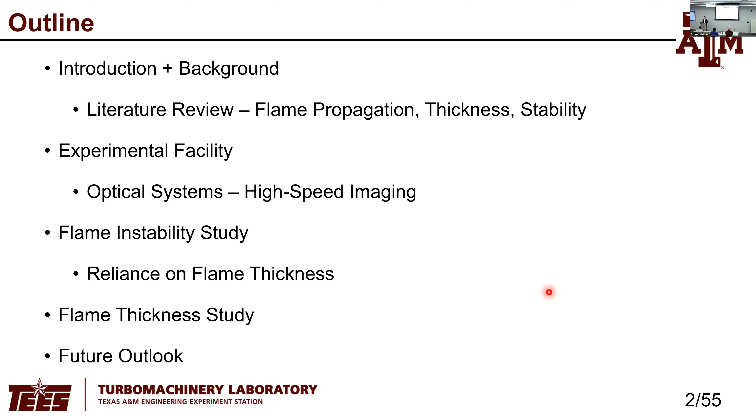So to start off with some background, why does any of this matter? When designing a combustion system, we need to know how fast combustion will happen and how long, both in time and in space, it takes for combustion to occur. In any kind of engine or combustion system, there are a lot of processes that have to happen: fuel injection, things have to mix, we need to get to stoichiometry, more or less. And then the flame has to propagate and burn all of our reactants to release heat and get us the useful work that we need.

The amount of time that takes should roughly match how much time or space is given in the system. So we need to know how fast things occur so we can design systems to work well.

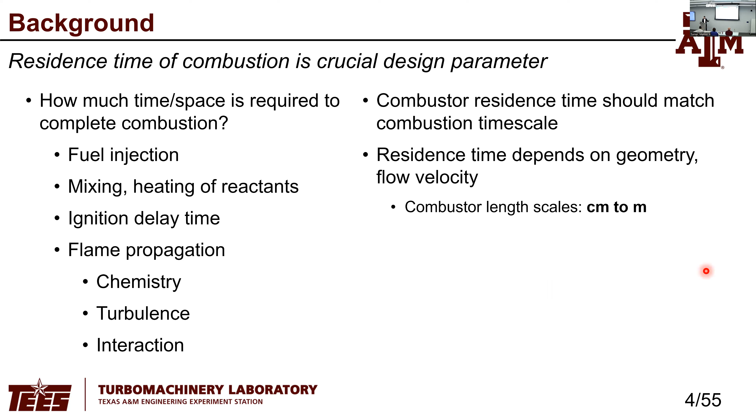Some of the length scales here, we're talking about centimeters to meters, inches to feet. And some of the time scales here are basically on the order of milliseconds overall. Some of the combustion processes take place over microseconds, but overall we have milliseconds for these things to happen. So really, really fast processes, which means we need high-speed cameras, basically.

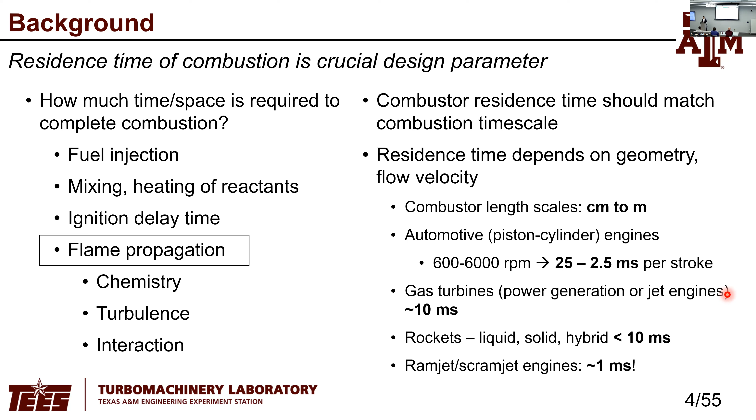With that in mind, we need to be looking at flame propagation. That's kind of where all this is coming from. We're going to be looking at flame propagation, the rates that requires, and the things that affect how fast flames propagate.

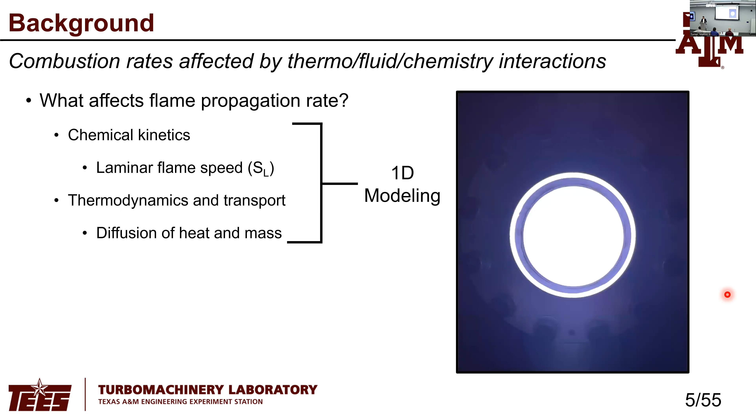So I kind of broke it up into some really general concepts here. The things that affect flame propagation rate are basically chemistry, thermodynamics, transport, and fluid mechanics, which we'll talk about in a minute. Chemistry, thermo, and transport can be modeled in a one-dimensional way, which is relatively simple. We like one-dimensional models. They're easy, fast, relatively speaking.

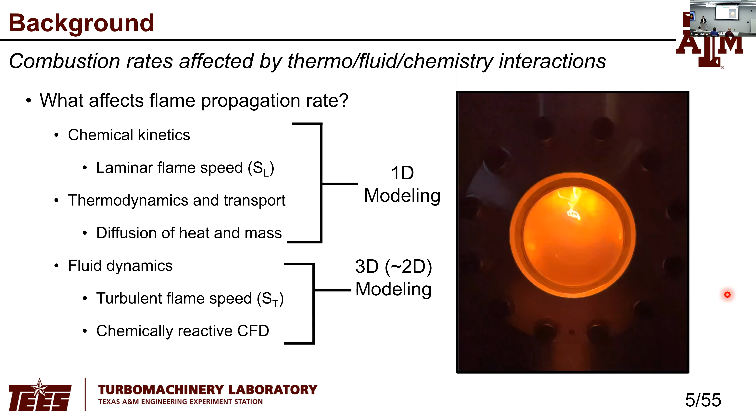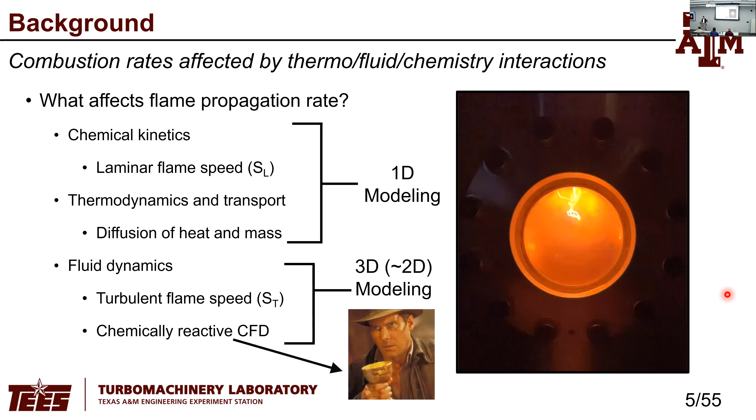It gets more complicated when you talk about fluid dynamics, turbulence, things that you have to account for in multiple dimensions. You can't model turbulence in one dimension. Two dimensions, we can get somewhere. Three dimensions is real, but that takes an immense amount of computational effort. And when you combine 3-dimensional turbulence with chemistry and the rest of these things, we get chemically reactive CFD, which is kind of the holy grail of combustion research.

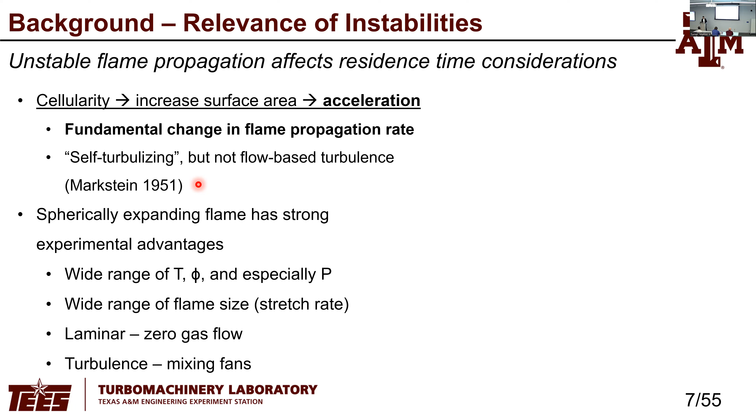We use a spherically expanding flame setup. It has a lot of advantages, mostly due to the fact that inside the rig it's a constant volume, closed chamber, and we can control the fluid flow very well. For a laminar experiment, the gas isn't moving, so we don't have any of the problems that come with a Bunsen burner or other types of flame burners that have to deal with the flow of gas through the burner. There's no flow here, and all the experiments here I'll show are laminar.

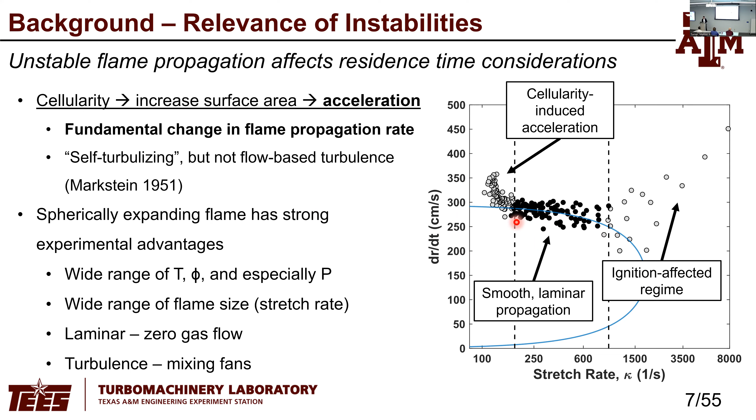Just a little bit of literature review on some of the fundamental research that kind of started this instability field. Darrieus and Landau in the late 30s, early 40s, independently but simultaneously came up with an instability, basically a proof to show that flat planar flames, which are kind of a one-dimensional idealized flame, are inherently unstable when a perturbation is applied to the flame that is greater than the flame thickness.

Their model was relatively simple. It didn't account for flame structure, so the flame had no thickness. It was simply a kind of demarcation between the unburned reactants and the burned products, which meant that it was invalid for small wavelength disturbances on the scale of flame thickness because it couldn't resolve that.

Markstein built on that and did a lot of experiments that showed that the instabilities are controlled by pressure and fuel molecular weight, which are essentially proxies - pressure being flame thickness, and fuel molecular weight being thermal and mass diffusion, so the Lewis number. I'll explain those in a little bit. He came up with a curvature correlation, essentially, that shows that when we have a curved flame, that actually helps stabilize the flame.

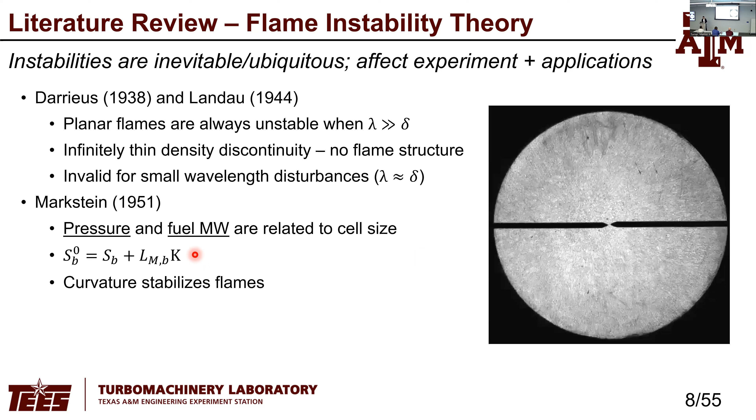So we have a curved flame here, that's our spherically expanding flame. A curved flame front is actually more stable than a flat flame front to these instabilities. About 20 years later, some Soviet researchers actually came up with a spherically expanding flame model. All the stuff before the late 60s was built on a one-dimensional flat flame. There were things built on that, but essentially this was the first spherically expanding flame model in the late 60s that took into account Markstein's curvature effect.

Fast forward another 20 years, and some researchers at Northwestern University in Illinois, specifically Moshe Matalon, built a model that predicts the onset of these instabilities. It takes into account thermal diffusion, mass diffusion, the hydrodynamic instability, and essentially combines all of these effects on a spherically expanding flame and shows how these instabilities will grow with time.

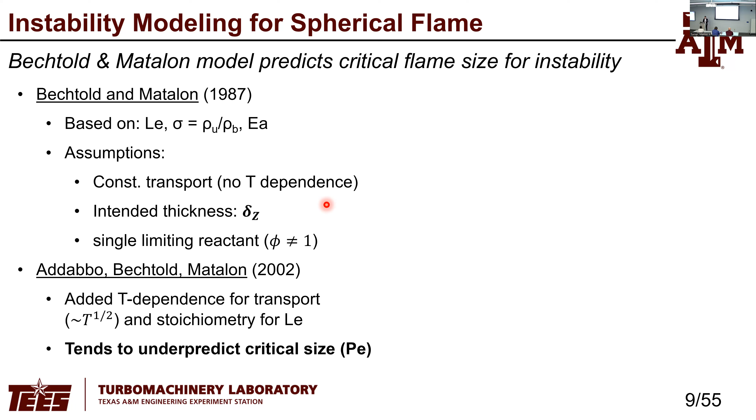There were some assumptions, some drawbacks made with the initial model in the late 80s that basically didn't take into account certain aspects, but then about 15 years later they developed some modifications that took into account temperature dependence of things inside the flame, different properties of the gas, transport properties, and then a stoichiometry effect for the Lewis number, because the thermal diffusion and mass diffusion rates are controlled by which reactant is deficient. So if you have a lean mixture, we're fuel deficient, and that means that's the controlling species.

So one key aspect of this model is that historically it tends to underpredict the critical flame size for instability. What the model does is essentially predict how big the flame has to be for the instability to set in.

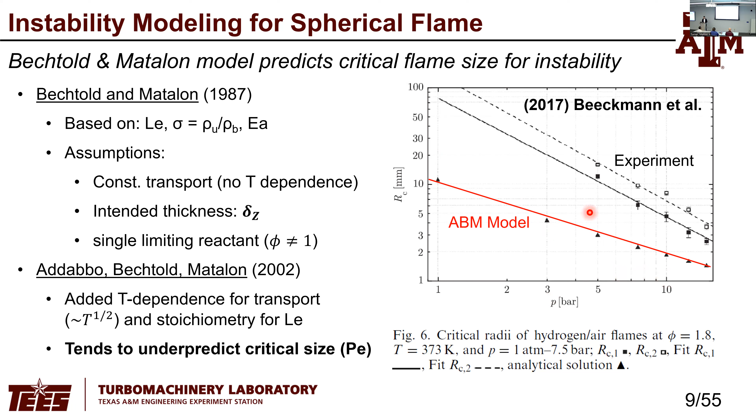This is one of their most recent works, a paper from Professor Matalon. Their experiments are shown here in these black points. This is the critical radius of the flame, so the flame size at which the instability sets in. Then the model down here in red underpredicts what the experiments show. This is relatively recent, and this is a relatively simple mixture - just hydrogen air, rich, a little bit of heating, a range of pressures - but it just consistently underpredicts the critical flame size.

Now, like I said, the flame thickness can account for the effect of pressure. This is one of the things that George Markstein kind of figured out.

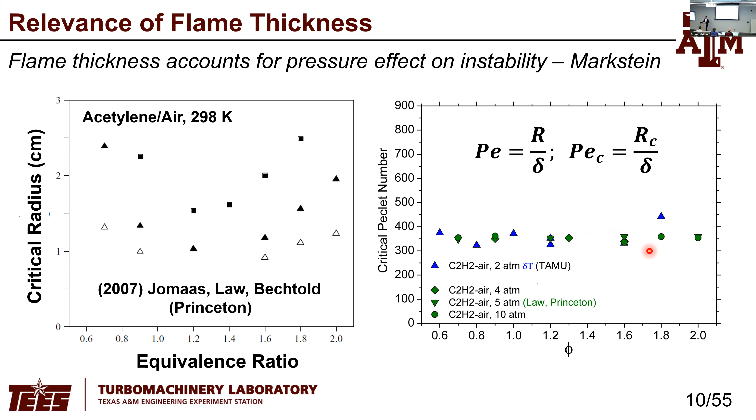What this shows is that acetylene flames go unstable at about 400 flame thicknesses. When the flame gets to be 400 times its thickness, the instability sets in. I took some data several years ago, the blue points here at a lower pressure, and showed that we are in agreement with what's there in the literature. But you need the flame thickness to get this Peclet number to accomplish this normalization.

And so we'll get into all of the things that implies. But yeah, how do we get flame thickness? How do we measure it? We can predict it, and I'll talk about some of that as the presentation goes on.

There's a definition of flame thickness that they've called the laminar flame thickness, which is essentially the ratio of kinematic viscosity to flame speed. So it's a relationship between viscosity, or momentum diffusivity, and convection. And this laminar flame speed predicts a flame thickness of between 40 and 200 microns. But their measurement is millimeters, orders of magnitude greater. So we're talking about 25 to 50 laminar flame thicknesses.

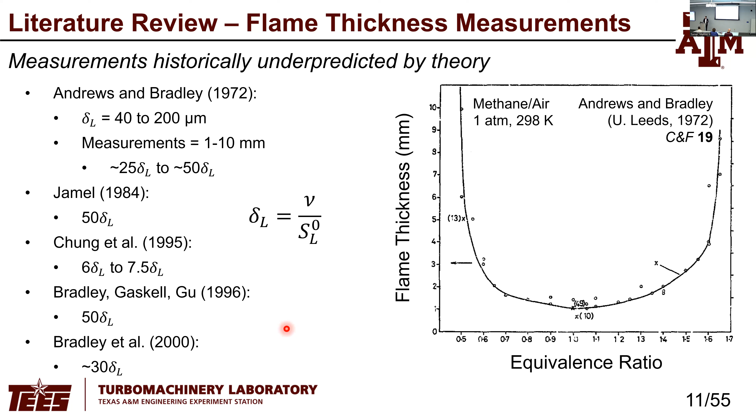And then this is some more literature data here from several groups. Dr. Bradley has done a lot of flame thickness measurements over the years. But essentially all of the data here show that measured flame thicknesses are always significantly greater than what's predicted by theory. Conversely, theory always underpredicts measured flame thicknesses. So what this means is that the theory doesn't really pick up what's happening inside the flame, and maybe the definitions aren't lining up, and I'll get into that.

But to kind of explore that, we need to figure out what happens inside the flame. So here on the right I have kind of a schematic of a flame. It's a propagating wave, the flame being this kind of red zone. And if you imagine a flame propagating in space through a cloud of reactants, as it propagates from right to left here, the burned products are on the right, high temperature, low density product gases propagating into the reactant mixture, which is fuel and air, fuel and oxidizer, at low temperature, high density.

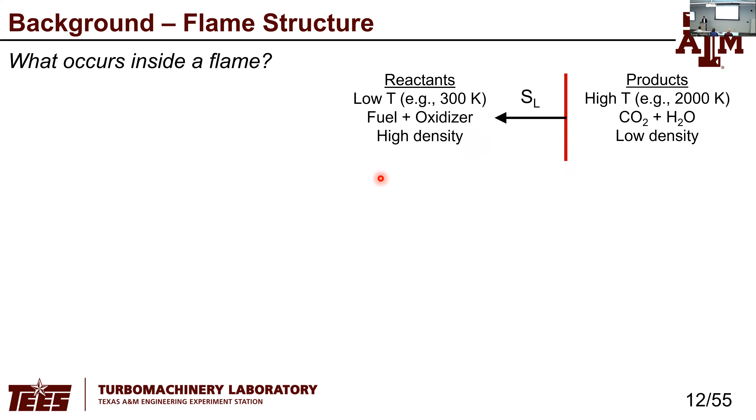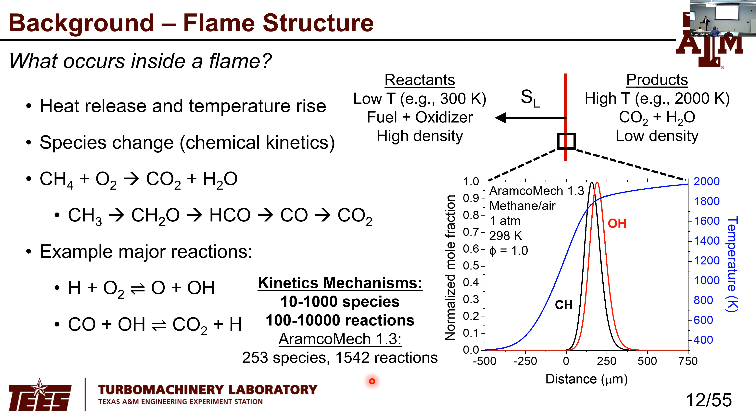And this can be run on a PC. You can calculate flame thickness using this in 10 minutes for one condition. It does take some time.

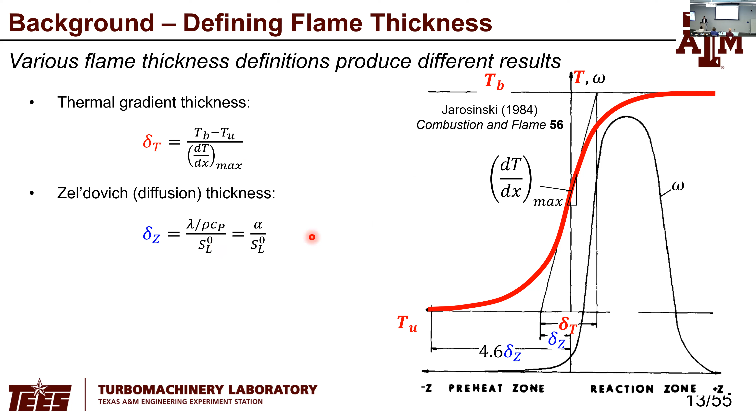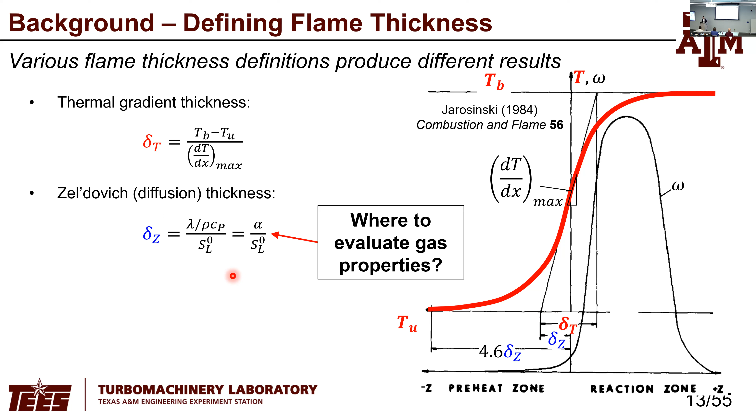That's usually calculated from the reactant properties of thermal conductivity, density, specific heat. But we need to pick a place to analyze these things because these are temperature dependent properties, and the temperature is changing rapidly throughout the flame. So depending on where you choose to evaluate these properties, that can affect what that definition gives you, what that thickness is. So there's some drawbacks to that.

There's also other ways to characterize the flame. There's many other things that are changing - species being created and destroyed, heat release, we can look at viscosity changes, there's a density change that happens. And then that laminar flame thickness that I talked about is the viscosity definition that a lot of people use.

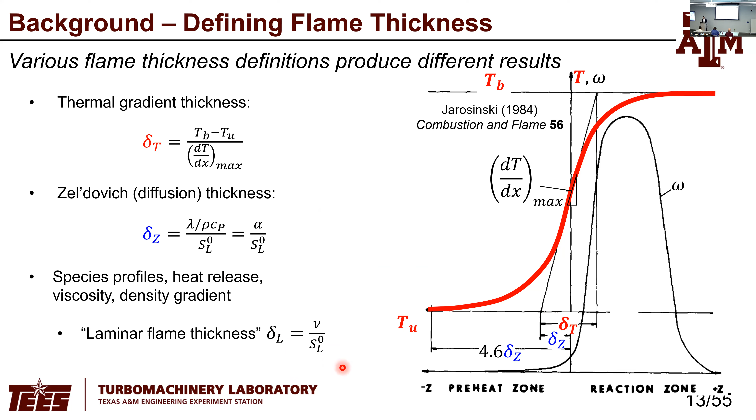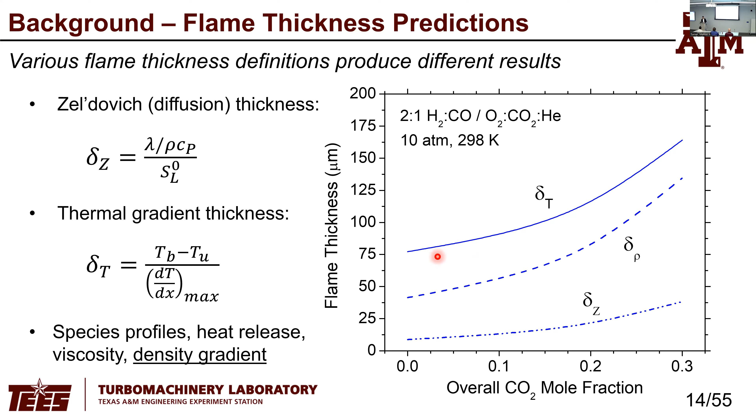There are species that change throughout the flame, and we can look at those profiles to get a thickness of that profile. This is the same plot as before, with CH star and OH star. For these species, we can normalize and look at the full width at half max thickness. This can be taken from kinetics predictions.

We can model these relatively quickly, but as I'll show, we can actually measure this as well, using chemiluminescence imaging to look at the light emitted from the flame.

Each of these molecules emits very characteristic wavelengths of light. OH star has a characteristic feature at 307 nanometers, which is in the UV. You can't see this with the naked eye, but cameras can. CH star emission happens at about 431 nanometers, which is blue, which is why this flame looks blue.

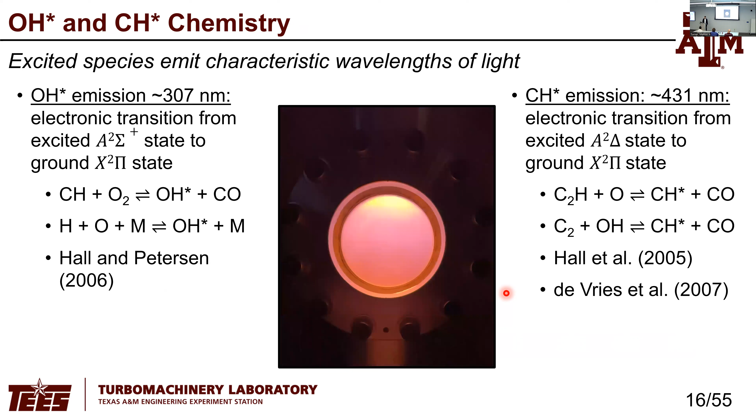This is a phone video that I took from one of my experiments. It was so cool to look at this and see that's CH star - that's exactly what we're imaging in the experiments I'll show later.

These are some of the reactions that occur that form these molecules. OH star formation is shown here, and there are other reactions that go into forming or destroying these molecules, or at least causing them to emit light or convert to some other molecule. Same thing with CH star over here. Previous students in this group with Dr. Petersen have done a lot of work building these chemical kinetics models for excited species, specifically Joel Hall and Jaap de Vries.

What's the frame rate of that movie? About 180 frames per second. It's just your camera - yeah, that's my phone. Played back at 30 frames per second, so it's about one sixth regular speed.

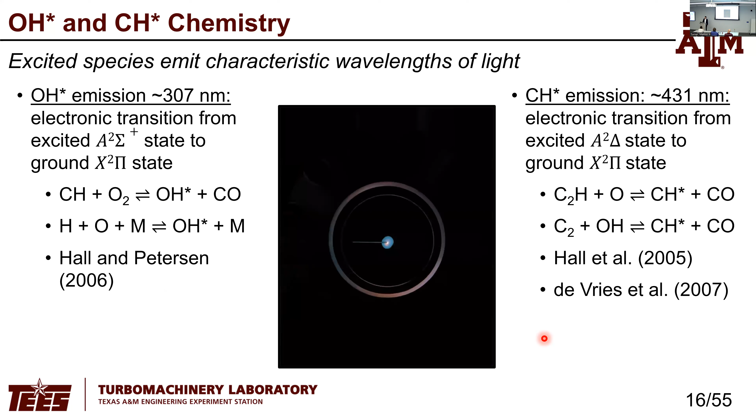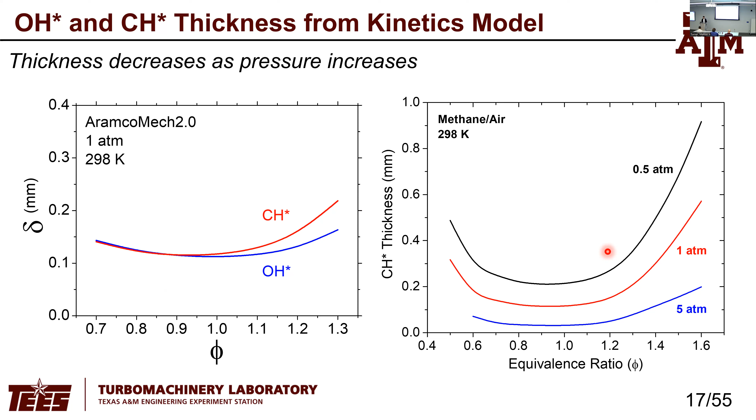To summarize where we are so far: flame thickness and flame instability are tied. Flame stability affects the propagation rate of a flame in ways that are not really well known at this point. The leading model for predicting the onset of instability tends to underpredict when the instability will happen, which means it will overpredict flame propagation rates in a greater sense. And measured flame thicknesses tend to be underpredicted by theory by about an order of magnitude or more.

However, there are different flame thickness formulations, and that can have an effect. It could be that we're measuring something other than what the theory is for. If we're measuring a Schlieren interferometry measurement, that's a density-based measurement, so it doesn't really make sense to use, say, a viscosity flame thickness. So that's what I mean there.

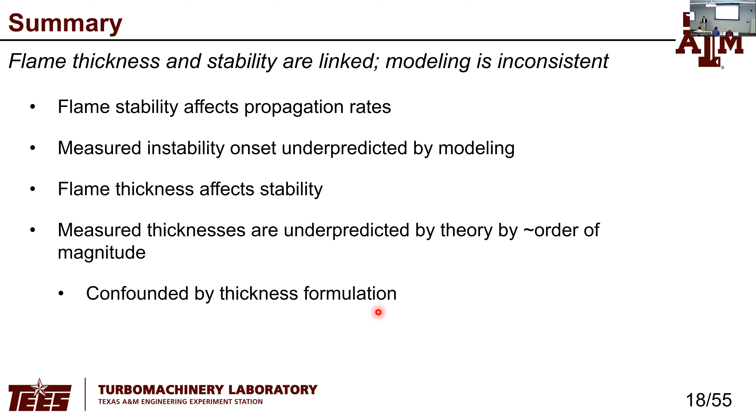So to look forward at my objectives for a lot of this work, I basically wanted to measure the onset of instability in a range of flames. I wanted to evaluate the model we use for predicting that and look at the effect of different definitions of flame thickness on that model, because the flame thickness has to go into the model to compare to the experiment. You need the flame thickness to compare experiments to the model, and try to figure out what's the relevant flame thickness, that length scale.

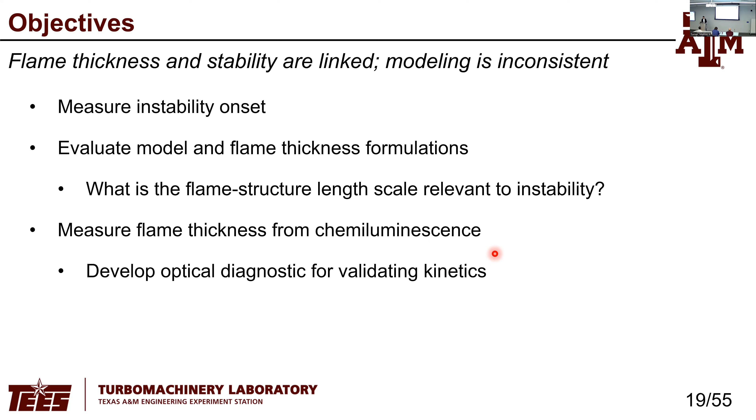As far as measuring flame thickness, I wanted to use chemiluminescence imaging, looking at CH star and OH star, and develop that diagnostic to get a working system for measuring flame thickness. So now I'll go into all of the tools I used for doing this: the spherically expanding flame rig, the high-speed cameras, and all of those tools.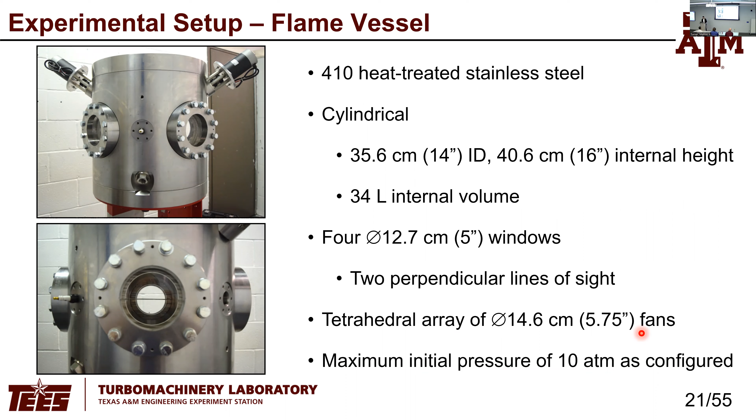One of the optical diagnostics we can use is a Schlieren diagnostic, which essentially takes a mercury arc lamp that emits very bright white light. We collimate that as a 6-inch diameter beam and put it through the 5-inch diameter windows. That light is collimated, so all the light beams are parallel to each other. As the flame propagates through that light, it bends the light. The density gradient causes refraction, and we can measure that with the camera.

Just to give some reference for the numbers I'll talk about later for the chemiluminescence camera: the Schlieren camera has a 1 microsecond exposure time, at least that's what we've used. Frame rates of 5,000 to 25,000 frames per second, and a resolution or magnification of about 330 microns per pixel, 30 pixels per centimeter. Try to keep those numbers in mind for the chemiluminescence diagnostic.

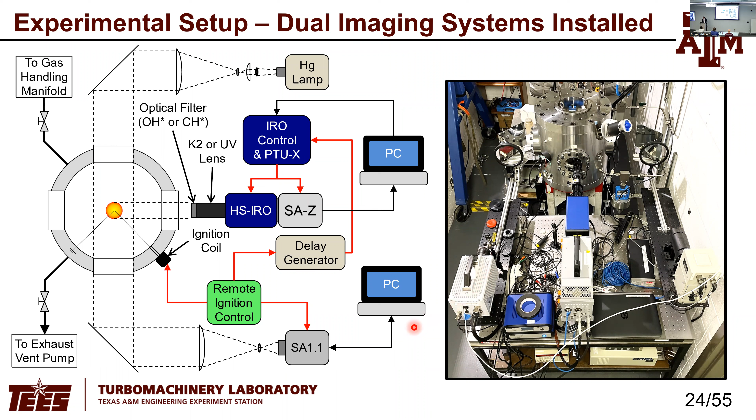For the chemiluminescence camera, we need a way of getting a scale from pixels to distance.

For the Schlieren camera, we have the windows. Those are 5 inches in diameter. That's a very well-known dimension, and so we have software that gets that scale from every image.

In the chemiluminescence images, we don't see the window, so we need some other way of getting the scale. So we used a US Air Force resolution target.

This is a cell phone picture that I took. This is about 1 inch in diameter, and so this little scale down here is quite small. Basically, this is a pattern of lines that are evenly separated, and these have known dimensions, and we can image that with the camera.

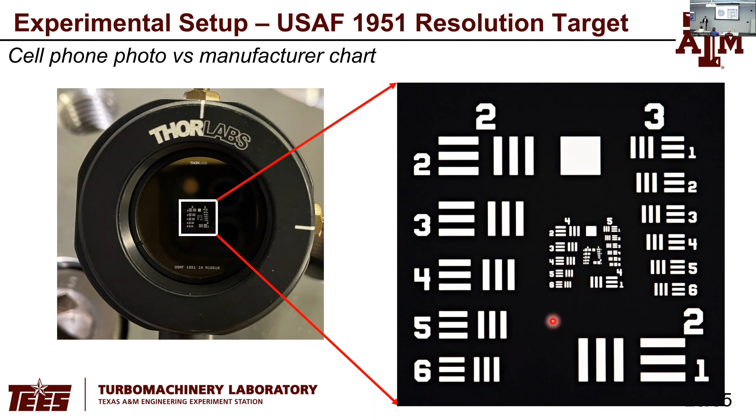This is what it should look like, and this is what our camera picks up. So essentially what we do is we look at the pattern, the largest pattern that is indistinguishable and gets blurry. There's a little bit of arbitrariness, ambiguity in picking which of these features is the largest blurry one.

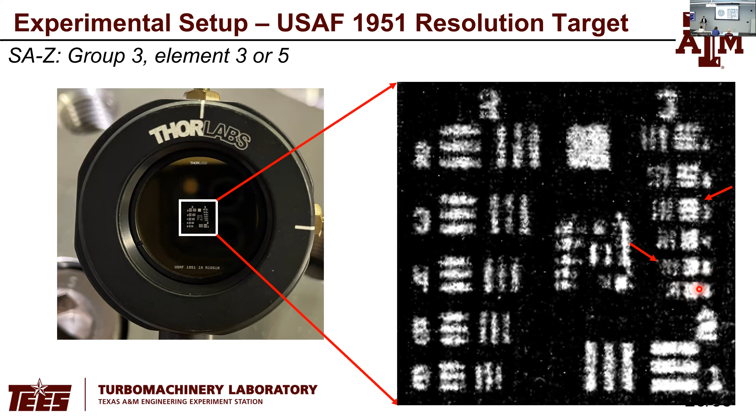But let's say we pick this one down here, which is group 3, element 5. Then basically go and look up in a table what that gives us as the ultimate resolution. For group 3, element 5, that gives us 12.7 lines per millimeter, line pairs per millimeter, I should say. The line width at that point, each of those lines is 39.4 microns wide, which means that the line and the space next to it is that width.

My analysis basically says that with this setting, the blur, or kind of the bleed of the light coming out of that line, is half of this distance, because the dark area is getting overcome by kind of blur or diffraction of the light. So we have a bleed of about 20 microns. And I'll show later that actually lines up almost perfectly with the experimental uncertainty, which could be a coincidence, but I don't think it is.

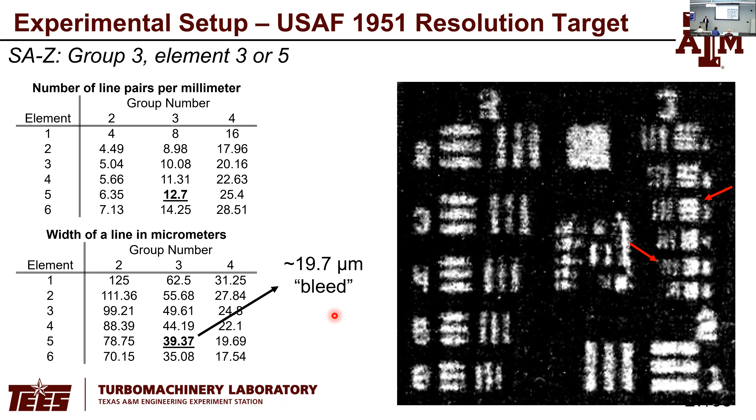And then another thing here is that we got the scale for the images, like I said, from these large bars down here. These groups were 625 microns wide, and taking many average measurements from those bars gives us 13.5 microns per pixel. This is the highest magnification setting that we used.

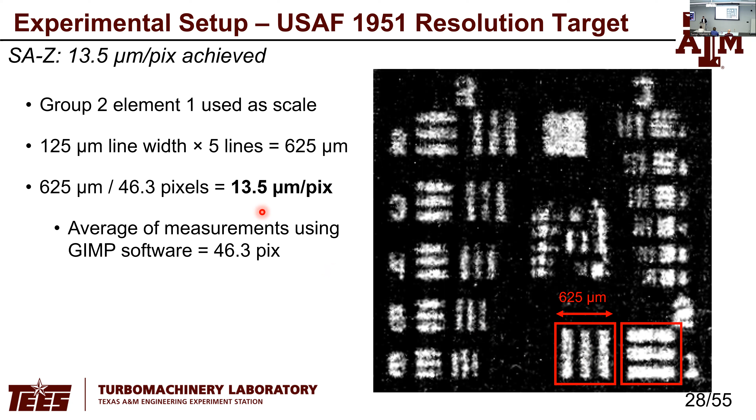For the other lens, the low magnification lens, we basically had the same setup, and I'll show those numbers later. So that's the experimental setup. Now we'll get into the flame instability study and look at some of the results from measuring the onset of instability.

To measure the onset of instability, we need to know the flame size. So we use an edge detection algorithm. This was built by a previous student, Travis Sykes. Essentially, from our Schlieren images, we can track flame radius and therefore the flame speed. And then we can identify which image had the first sign of the instability and mark that as the critical radius. We can track the radius in time with the frame rate of the camera.

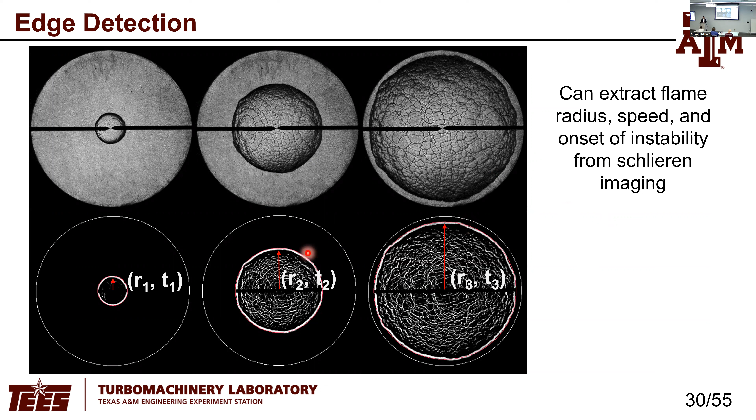One thing we can do is measure radius, flame speed, and then we can also get the critical radius. And then if we know the flame thickness, or pick a flame thickness, we can get the critical Peclet number for the onset of instability.

The gas mixtures that I used for this instability study were syngas mixtures. I'm not going to go too much into detail on these, but essentially there were 5 component mixtures of hydrogen, carbon monoxide, oxygen, CO2, and helium. With all of those knobs I can turn, I can control thermal diffusion, mass diffusion, flame speed, and all sorts of things.

To constrain some things, I picked the stoichiometric equivalence ratio, so all of these are phi = 1. And I controlled the dilution, so it was the same for every experiment. Every mixture had the same amount of reactants, same amount of inert gases. The mixtures don't necessarily matter that much for what I'll be talking about.

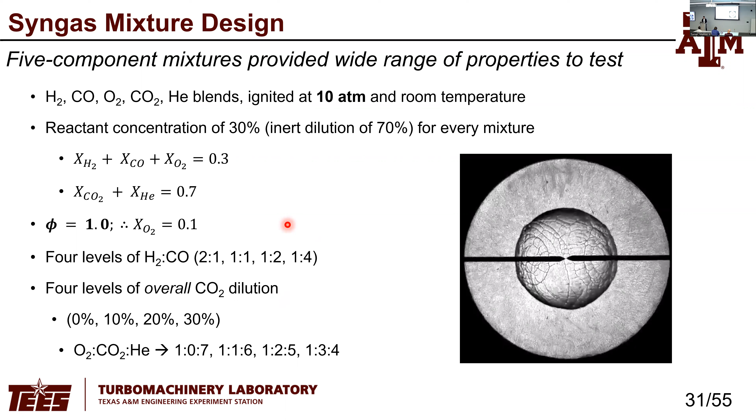But one big thing I want to point out is that because these have so much helium in them, the Lewis number is always above 1, which means that from a thermal diffusion standpoint, the thermal diffusive instability is entirely suppressed. So these flames will only exhibit hydrodynamic instability, which is still affected by thermal diffusion. But the onset of instability that I'll be measuring here is essentially always hydrodynamic.

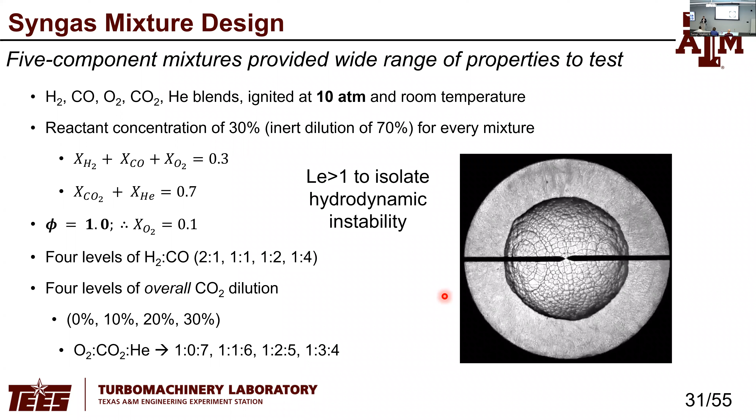And that's what these look like here in this video. So as the flame propagates in this video, we can kind of say right about here is where the instability sets in. For each experiment, I look through and pick that and then develop an uncertainty from that based on how the instability kind of fades in over time. So there's a range of frames that you could say the instability starts in, which gives us an experimental uncertainty.

So this is the critical radius results from this study. We can kind of see these uncertainty bars being the range of frames that I was talking about.

Basically what we're seeing is that with these mixtures, the critical radius ranges from about 1 centimeter up to 6.5 centimeters. This flame right here happened to go unstable right before the edge of the windows, so that was kind of convenient.

There are two mixtures here that I wasn't able to study at higher CO2 dilutions because they were too slow and had the buoyancy instability. When that sets in, it kind of changes the whole dynamic, so I didn't analyze those for this instability. But the uncertainty there is about 0.1 centimeters based on the uncertainty in the frame that we're choosing.

One thing we're seeing here also is that the instability onset is not really dependent on the CO2 mole fraction, which is kind of interesting. It's more controlled by the amount of hydrogen in the mixture.

This is because hydrogen, two things. One, hydrogen is such a small molecule, it diffuses really quickly, which makes things unstable. It also creates a thinner flame, and both of those things—a lower Lewis number and a lower flame thickness—cause instability to set in earlier. So these high hydrogen mixtures have a low critical radius, low hydrogen, high critical radius.

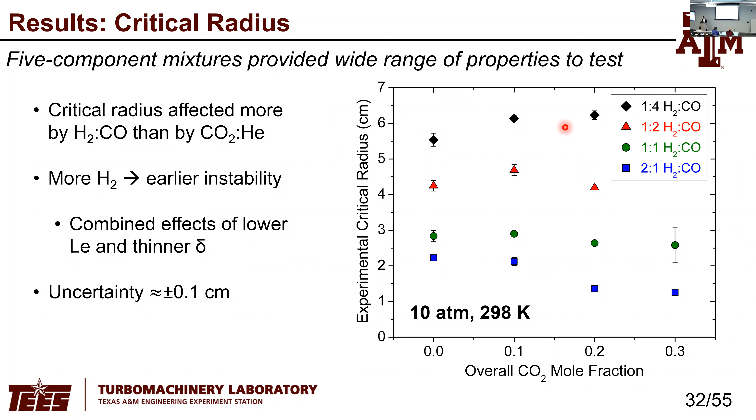Now, the model for this predicts the Peclet number. It doesn't predict radius, so you have to pick a flame thickness to compare between the two. So at first I looked at taking the experiment, dividing by flame thickness, because we measure the flame radius, divide by flame thickness to get a Peclet number, an experimental Peclet number, and compare that to what comes out of the model.

Essentially what that means is we're dividing a big number by a small number, which means the number gets a lot bigger. The uncertainty for these increased significantly, it just kind of amplifies that 0.1 centimeter uncertainty onto the Peclet number scale. The uncertainty in the model is based on variability in the input parameters.

I don't really have time to talk about all those different things, but essentially there are inputs to the model that must be modeled from another model. Those things have some uncertainty based on how you model them, and so those inputs give us these uncertainty bars on the model up here.

What's interesting is the model overpredicts the onset of instability if we use the thermal gradient thickness or the density gradient thickness that I talked about earlier. These are kind of larger flame thicknesses.

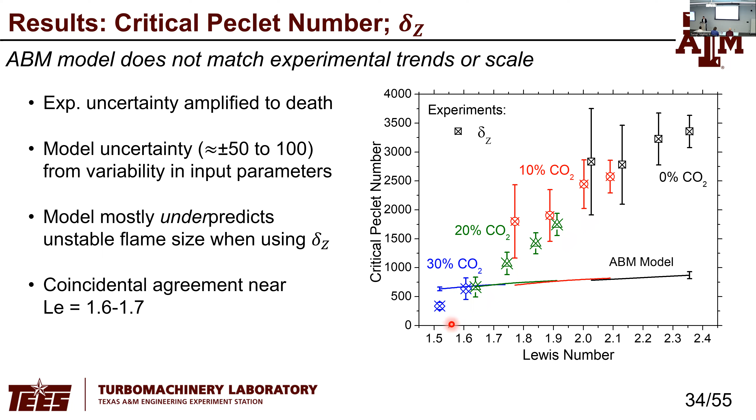Now, I wanted to look at it the other way around. The experiment, we measure the critical flame radius. Let's take the model and fit it to the experiment—that's what we should be doing. So instead of converting flame radius, I'm going to convert the Peclet number from the model, multiply it by the flame thickness to get the flame radius. That's what I'm showing here.

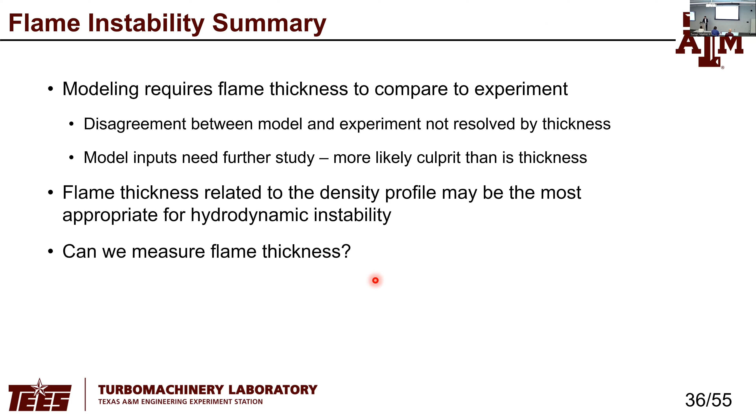But that leads us into the flame thickness study. So can we measure flame thickness, and are our modeled flame thicknesses accurate? We need to use a model to get flame thickness for these other things. So now we're going to talk about the flame thickness measurements, which were driven by chemiluminescence.

On the left here are the lower magnification settings and a sample video. A couple things to point out: first, for the lower magnification lens, it transmits in the UV, so we can look at OH star and CH star. Because it's not as magnified, we can see the full flame, zoomed out, and we can actually measure laminar flame speed using edge detection. That was the topic of my master's thesis back in 2019.

From this part of the study, because we do OH star, we looked at lean, stoichiometric, and rich methane-air flames at 1 atmosphere.

Now, if we use a higher magnification lens - this is the K2 lens - we can only look at CH star. However, that's not necessarily a big drawback. I looked at a wider range of conditions: methane and propane flames at a range of pressures from below atmospheric to twice atmospheric pressure, looking at CH star.

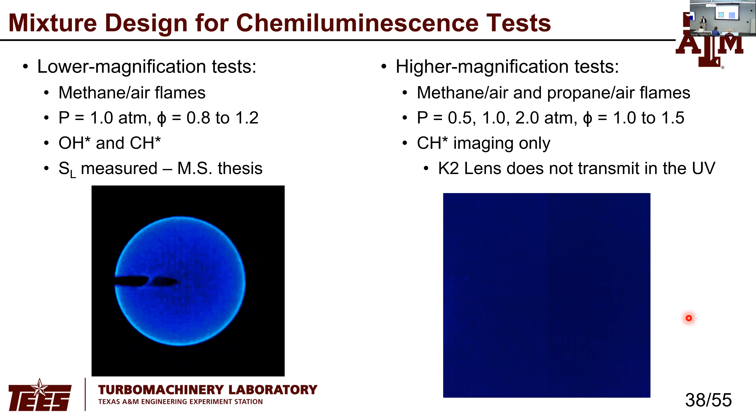This is a sample of the images. They're zoomed in, so we can only see a portion of the flame, but this is actually the way to go for flame thickness - we can zoom in and isolate the flame front. However, we need a way to correct for line of sight integration, because we're looking at light emitted from the full volume of the flame. The camera picks up all of that emission, but we're only interested in the flame front, so we have to correct for that.

The Abel transform is commonly used for this. This is an example of the process. It requires symmetry, so we take our raw images, center them, and make sure we have symmetry about the origin, or cylindrical symmetry. This is the Abel-transformed result on the right. We can see that all the light from the burned gas in the middle of the flame is taken away, really isolating the leading edge of the flame front. There's some noise in the middle, but we don't analyze that - we only look at the flame front, so this noise doesn't affect the measurement.

So these images are the low magnification, but our high magnification images zoom in and look at that portion of the flame. In the interest of time, I'm not going to talk about the differences between those two and how we analyze them, because in the end it's the same - we're looking at a horizontal intensity profile.

So this is an example Abel-transformed high magnification image. This bright line through the middle, I did that - that's my way of showing these are the pixels that I interrogated and sampled the intensities from. We take a measurement across the flame, and that gives us this normalized intensity profile over here.

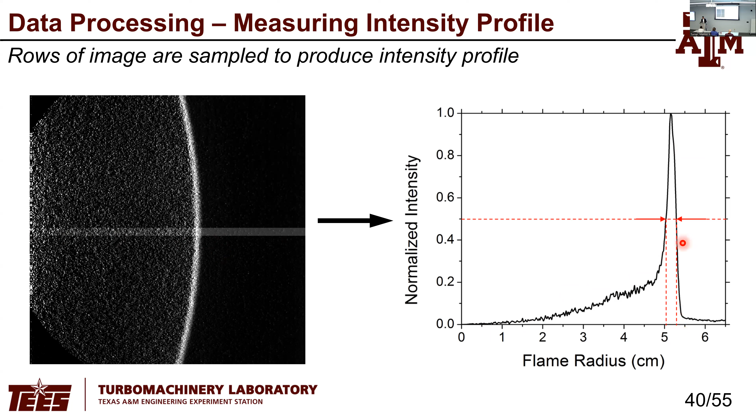We can do that for every image in the experiment. Over the experiment, we take anywhere from 30, 40, 50 to a couple hundred images, depending on the flame speed and other things like the frame rate of the camera. So we can track flame thickness in time with flame radius and other things.

So this is an example of one of the low magnification measurements that we took. At that time, we were seeing that the flame thickness was increasing with time. So as the flame propagates and as we're taking these images, the flame looks like it's getting bigger, thicker and thicker, even though in the experiment the flame really shouldn't be changing that much.

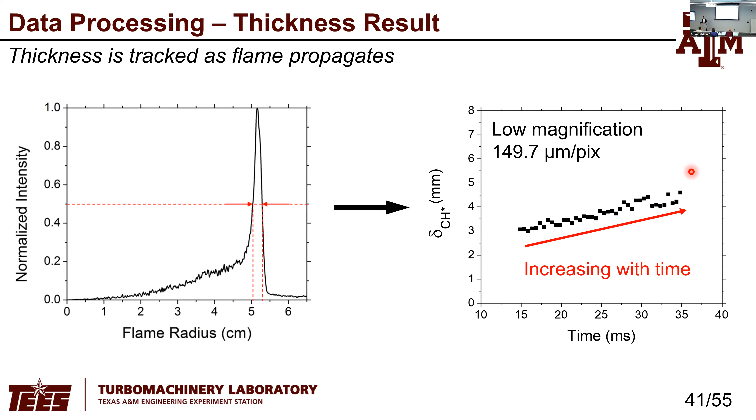The flame speed may be increasing a little bit because the curvature is changing. But what this meant was we were probably seeing a stretch effect - as the curvature changes, the flame thickness changes. So I ran with that and did a stretch correction, essentially extrapolating to a condition of zero stretch, which gives us the flat planar flame.

And for those experiments, those data are shown here. These points up here are the low magnification results. In blue we have OH star, and in red, CH star thickness. These are all for methane air at the low magnification.

Essentially what this shows is that as we zoom in - basically with the same lens, zoomed closer and closer in on the flame - the apparent measured flame thickness decreases significantly for the exact same conditions.

I applied the stretch correction to account for the effect of that flame thickness increase over the course of the experiment. I did that for all of these, but I just demonstrate it here on the right for the most zoomed in case.

Comparing to the model predictions for CH star and OH star flame thickness, the stretch correction tends to give us a higher flame thickness. Uncorrected, I just took the average of all of the flame thicknesses across that experiment.

At this magnification, we basically saw that we're on the order of the flame thickness from the model prediction. But the scatter that we're seeing and the effect of magnification meant that there needed to be some more work done.

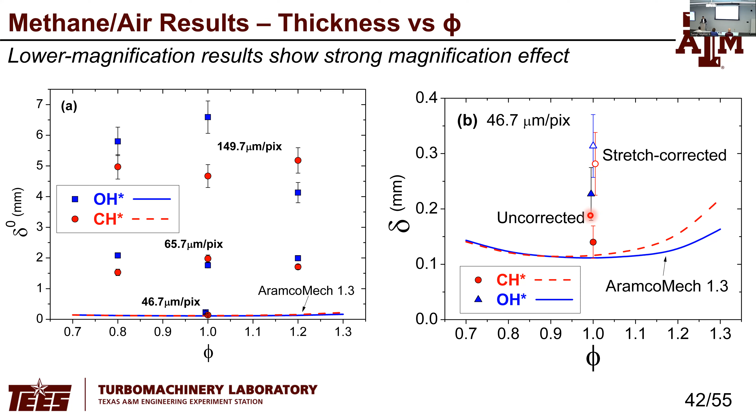So to quantify the effect of magnification, I built a discretization algorithm that essentially maps the kinetics profile, which is more or less continuous and smooth, onto the scale of the camera sensor.

So here on the left, these are the low magnification settings. Essentially, if we had this black CH star profile from the flame, and then looked at it through a camera with this pixel spacing, we would get these points. With the red, lowest magnification, what that shows us is that the entire flame ends up landing on 2 pixels.

As we zoom in to the highest low magnification setting, the flame ends up being resolved by maybe 6 to 8 pixels, which is getting closer. But one big point I want to point out here is that we miss the peak, no matter what.

And the other thing is that if we take this red profile and take a full width at half max thickness, that's going to give us a flame thickness that is significantly larger than the model prediction. So the model isn't necessarily right, but if the model is, the experiment's not going to catch it - the experiment will miss that result.

So with the new lens, much higher magnification, zoomed in a lot more with 13.5 microns per pixel, we get many more pixels across the flame. We can really resolve that profile. So that's what I'm showing here on the right with high magnification.

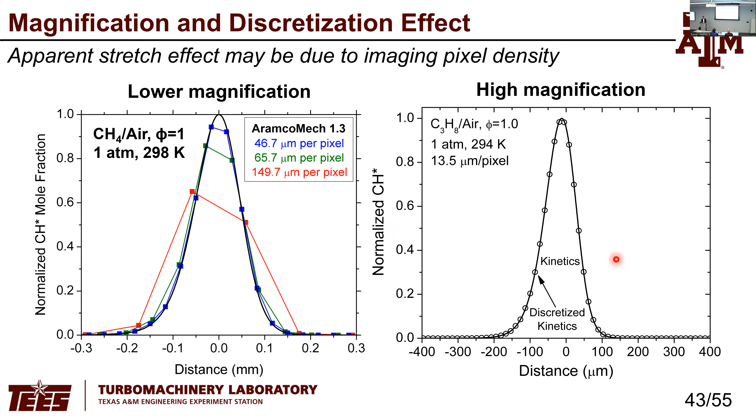Now, a little bit back to experimental setup, just to show with the chemiluminescence diagnostic installed at the same time as the Schlieren diagnostic, we can image the flame from 2 points of view at the same time with 2 cameras. With the Schlieren, we can look at the full flame and track the flame propagation over the course of that full 5-inch diameter. With the chemiluminescence diagnostic, it's zoomed in on this little white box here.

So the chemiluminescence video on the left is what the chemiluminescence camera sees. This is the exact same experiment, synchronized. Essentially what I'm trying to show here is that we can track things like the flame radius and flame speed with the Schlieren diagnostic, so we know what the flame's doing. And then with the chemiluminescence diagnostic, we can track the flame thickness.

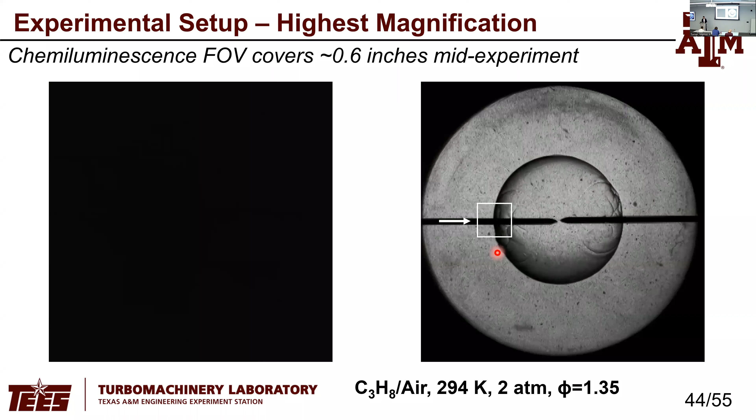And it looks like the synchronization is off because that's not right. But this is a propane air flame at 2 atmospheres. It's a rich mixture, and so we can line them up like that.

From those high magnification images, we apply the Abel transform and we get this red profile. So this is what we're using to get the experimental flame thickness. And for that same experiment, for one image, I just grabbed one kind of at random. We happen to get a flame thickness measurement of about 22 pixels, which is about 300 microns at this resolution.

And we do that for every image in the experiment. One encouraging thing here is we're not seeing the flame thickness change over the course of the experiment. So that apparent stretch effect or whatever was going on is probably an optical effect. We're not seeing it here at this high magnification.

So I averaged the flame thickness measurements for every image across that experiment and got an average of 19.4 pixels with a standard deviation of 3. And then using statistics, we can get a 99% confidence interval of 1.5 pixels.

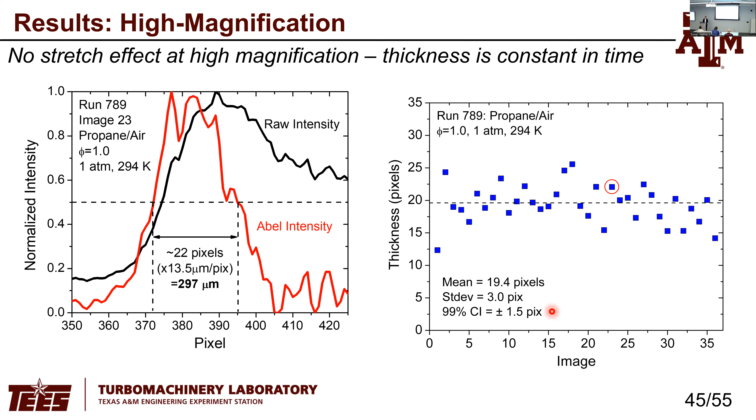What I think is a better way to look at this is just comparing the profiles from every image and lining them up. So here on the left, the gray lines are every image from that experiment. I'm looking at the profile, aligning them to the peak, and then taking the average of that with the red one. And then these uncertainty bars are the standard deviation.

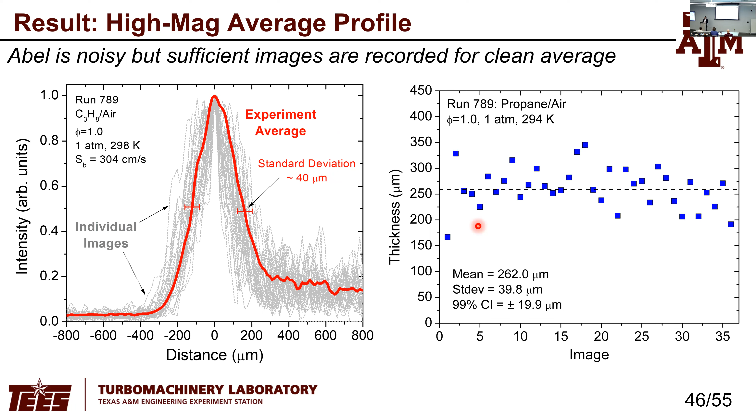Now I'm going to move quickly to keep an eye on time. But basically, we average that. Now the flame is moving during the exposure time of the camera, so we have to account for the blur that happens. So with the spot here, I'm showing as the flame propagates, over the exposure time of the camera, we have to account for that blur, and it's traveling a certain number of pixels, and we can calculate that. We have to round up by 2 because the flame isn't going to align that well with the camera.

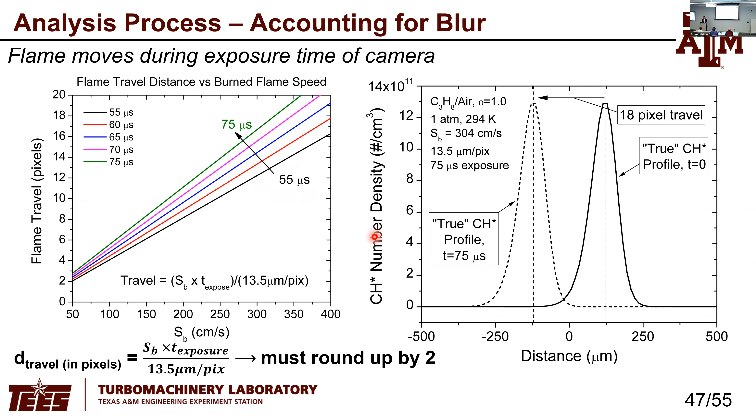And I developed a blurring broadening algorithm that'll calculate what would happen to the kinetically predicted profile if it went through the same effect that we're seeing with the experiment. I've done these on an absolute scale, which we can talk about later. We're going to miss the peak because of blurring, but when we normalize, which is what we're doing for the experiment, they line up very well.

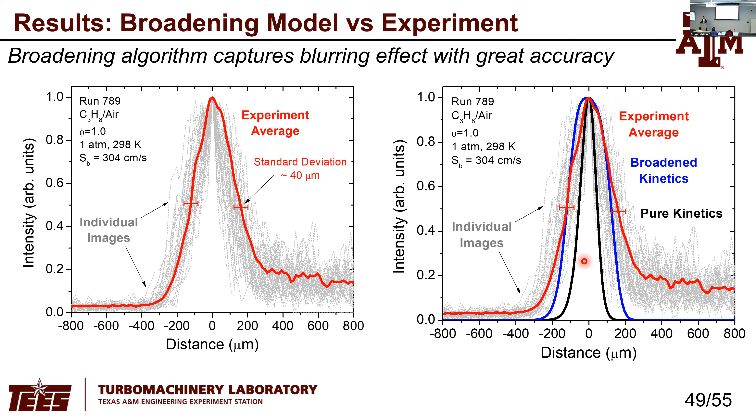So here on the right, the red is the experiment, the black is the pure kinetics results, but when we pass it through the experimental effect, we get the blue curve, and they line up really, really well. So what this means is we're taking into account the blurring effect accurately within the uncertainty of the experiment. We have good certainty there.

So to conclude, this flame thickness technique works very well for these mixtures. We can model the blurring very well. For the kinetics, I picked mixtures where the kinetics are relatively well known, so we have some certainty in the modeled OH star and CH star. In the future, I need to do some work cleaning up the analysis and streamlining it—I have 5 or 6 separate codes that analyze these things.

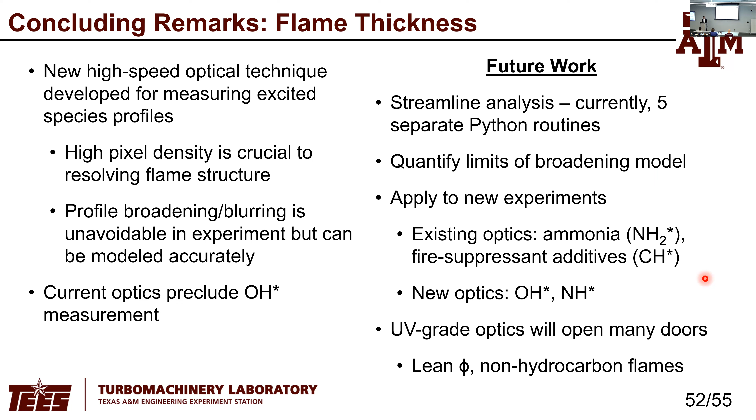One of the really valuable things here is that we can apply this to new experiments—for example, ammonia flames, or if we get new optics that transmit in the UV, we can do this with OH star. One drawback right now is that the K2 lens doesn't transmit in the UV, so we can't do this for OH star. Because of that, we're limited to rich hydrocarbon flames with CH star. If we get OH star, we can look at lean flames, since there's basically no CH star in lean flames, and we're going to need to look at that.

To conclude again on the flame instabilities: the model from Matalon does not necessarily perform well, especially for these complex multi-component mixtures where there's a lot going on with diffusion. Normalization by flame thickness makes for cleaner theory, but it doesn't really represent what's going on in the experiment very well because of that amplification of uncertainty. Characterization of the inputs to the model also needs to be done—a lot of these inputs have to be modeled, and that causes problems.

One thing I want to point out is there's a lot of data in the literature on measuring instabilities, because it's relatively easy—you just look at your images and there you go. But modeling it is much more difficult, and understanding what was going on in the experiment is also a big part of this.

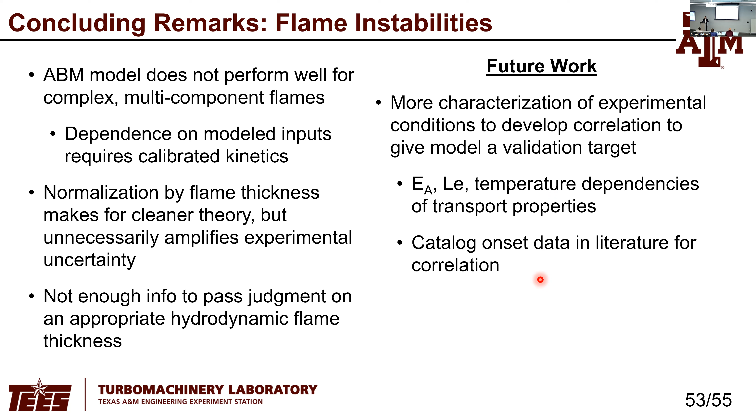I'd like to thank the committee for your time, review, and support over the years. I'd like to thank Carl, and I've been here long enough to know the previous facility manager, who was also very helpful—he taught me a lot about machining. Then the previous students I talked about earlier, Hannibal, Travis, Tyler, Matt, Pradeep, all very helpful. And I'd like to thank all of you for being here—I'm honored to have a packed room. I think this is one of the biggest defenses I've ever seen. Thank you.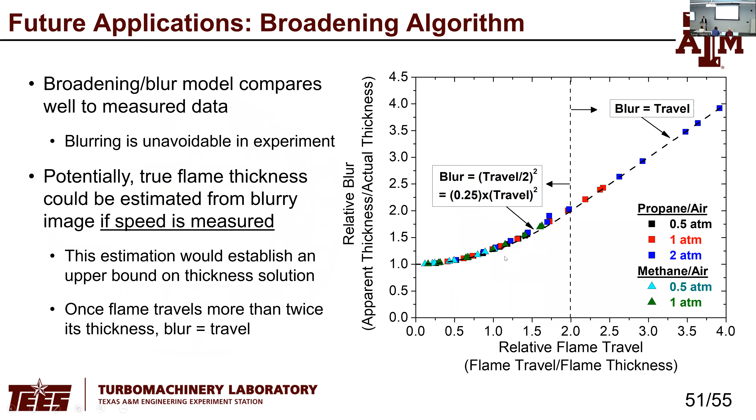A couple slides back, when you were showing the experimental measurements versus the models, it looks like they agree better at lower pressures. What effect does pressure have there, and why does it cause bigger disagreement as pressure increases?

That's a good question. Lower pressure gives you a thicker flame, which means we can resolve it better—we have more pixels across a thicker flame. For those, we actually had something like 30 to 35 pixels across the flame, which is more than enough to resolve what's going on; we're not missing the peak intensity. So we get very good agreement there. One thing I'll note is that for the propane ones, and maybe some of these methane ones, the experimental point is sometimes below that dashed line and actually closer to the true kinetics. That's because on that particular experiment, the exposure time was less than what I modeled here. There wasn't enough time to go into it, but exposure time also has a big effect.

Hi, can I ask a question from Zoom? Thank you, Dr. Rand. I couldn't figure out how to raise my hand on Zoom, it seems to have disappeared.

I wanted to say that the flame thickness is a very fundamental quantity, the laminar flame thickness, in a lot of the models we need to create. It's an input quantity. We often get it from chemical kinetics models, but sometimes these quantities don't work from chemical kinetics, so we need to get them from experiments. I came in late to your talk, but could you tell me in general how well the measurements agree with models, with these chemical kinetics models?

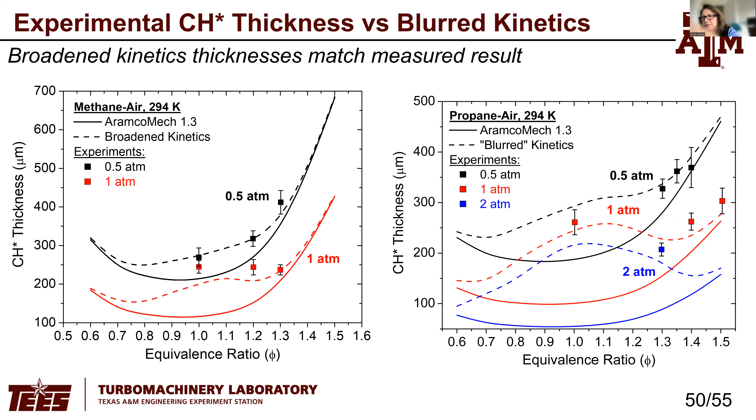Okay, when you take the chemical kinetics models and compute a laminar idealized flame burning, with no curvature effect, you measure the distance between the front of the flame and the back. There's a number of ways of defining it, but we usually pull a number out of there for the laminar flame thickness. Okay, I understand what you mean now. Yes, and that's a quantity we really need.

With this measurement, because we're taking into account only the excited species, we need to look at the relationship between the excited species profile relative to the greater flame profile. This profile is thinner, maybe half or a third of the full laminar flame thickness. For excited species, that profile is anywhere from a half to maybe even a quarter of the laminar flame thickness. But I think we're seeing really good agreement with the kinetics. So my intuition is that for kinetics that are well validated, the laminar flame thickness from that profile is accurate.

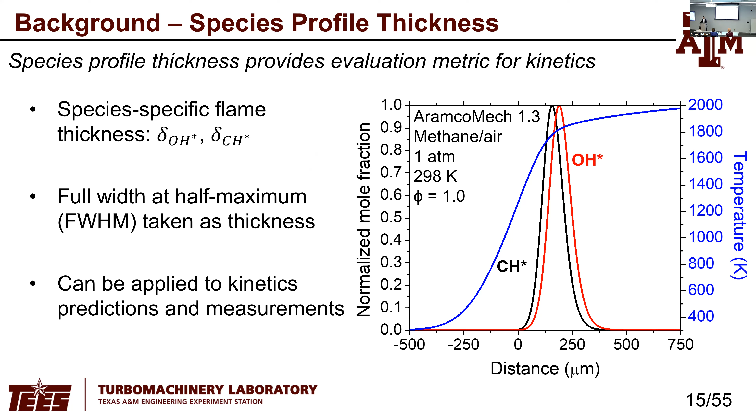My question is, when we look at your videos, it's not very clear as to when the instabilities start to show up. Can you go over your criteria for determining from your two-dimensional picture how you decide when the onset of instabilities occurs?

Yeah, I'll use this one as an example. Essentially, I can slow it down and pick out the image where this happens. Right about here is where it happens, but there's an ambiguous, operator uncertainty there. There's a range of maybe 5 frames. It depends on the flame, it depends on the experiment.

For some experiments it was actually pretty tough to figure out. Some of those wrinkles that happen at the beginning of the flame get in the way, and it's tough to say does this happen at frame 200 or frame 205. On the scale of the radius of the flame, that's not a big deal, 5 frames is not a big deal. But on the scale of the Peclet number, where we're normalizing by the flame thickness and had those huge uncertainties, that's where that 5 to 10 frames matters a lot. The short answer is I look at it and give myself a margin of error based on where it looks like it sets in.

I'll follow up on that. David actually got my question, so well done David, now I have to come up with a new question to add on to it.

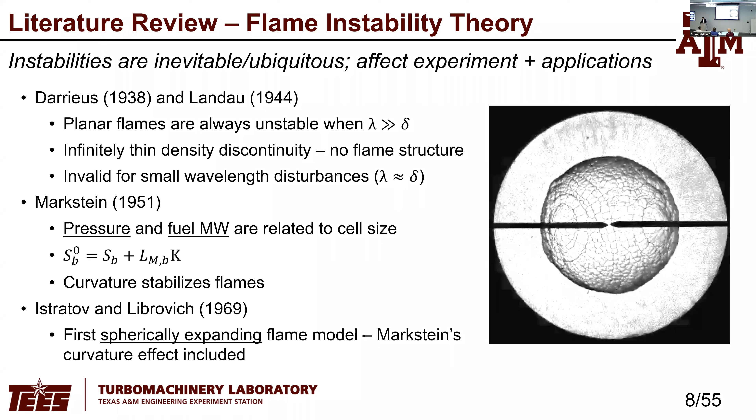I was wondering, had you tried some kind of Fourier transform or something to quantify this? You've done a fantastic job quantifying everything else about your imaging system, but that one is still an operator-subjective thing. Is there any way you could quantify the regularity of those structures to set up criteria? And as a follow-on, you've specified your line pairs per millimeter is like 20 microns, so what limitation could the imaging system have on your ability to detect some of these smaller structures, if you have this very large discrepancy between what you're finding experimentally versus the model? Could there be some underlying structure you're not detecting due to the limitations of your resolution and the fact that you're trying to do it with your own eyeballs?

Yes, so for the first part, I haven't done it, but there has been some work in the literature done using a contrast adjustment like this for these bottom images. Just to the eye, there's no instability here, but here there's all this stuff going on in the middle, and we can pick that up with edge detection.

I haven't quantified that, but there would be a way to. You're limited by your line pairs per millimeter, right? So you cannot make a comment below the imaging resolution of your system. With this system, we have a lower resolution than what I talked about earlier, that 20 microns. For this one, I'd expect it to be probably 5 times less resolved, maybe even more.

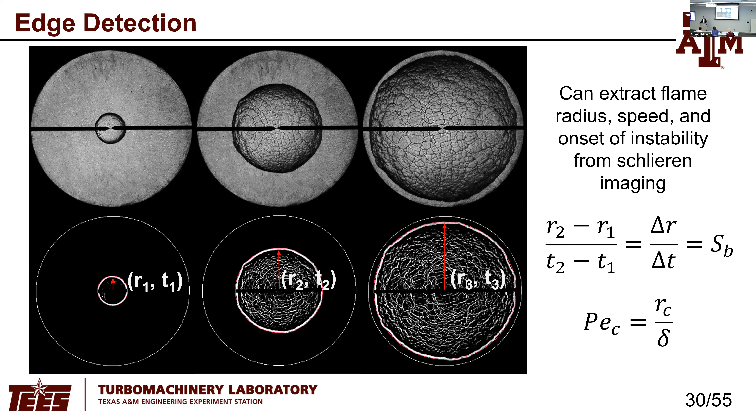Well, look at the difference. Show a typical difference between the model and your prediction. This is based on Rc, not the flame thickness. So Rc, pretty well within a millimeter scale, out of 5 centimeters or whatever. So it's actually a much bigger difference than the resolution thing, right?

Especially with the hydrodynamic instability, because it's density, and we're using Schlieren, so we're actually looking at density with Schlieren. I think Schlieren is the way to go for detecting onset of instability. Like you said, the model is over predicting. We're getting an onset of maybe 1 or 2 centimeters, and the model's saying 10 or 12 centimeters.

So, do you think you could see the other instability you mentioned, from the pictures in the bottom left corner of your examples, the thermal one, the diffusive one, which had a much finer structure? Can you resolve that with this system? Yes.

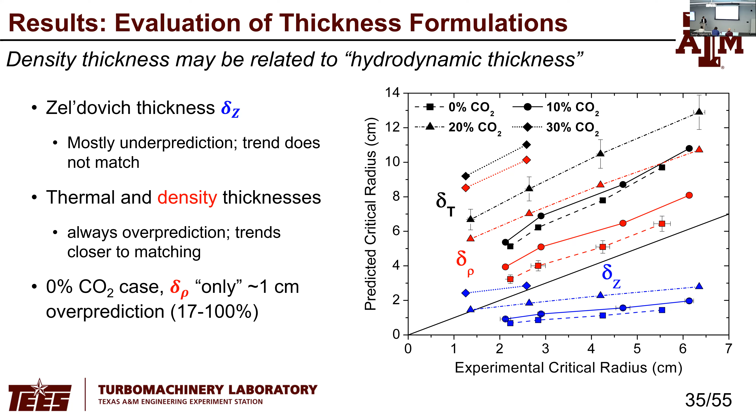So in the same way that using that edge detection would pick up all of those wrinkles, it's going to look the same with this one. The tricky thing is that this instability sets in very, very early, so the flame's really small when it happens. So that's the case where I don't think we could resolve the onset of that instability with this system, but it also happens from the very beginning of flame propagation.

Can I ask another question from Zoom? Isn't that, looks to me like a standard cellular flame instability, and you just called it those wrinkles. Is it not the cellular instability? It is the cellular instability, yes. There's a lot of work that's been done on that, both computations and measurements of this in methane, so I think there's something to compare to, unless it's a different regime.

I looked at syngas with this, so this was hydrogen and CO with CO2 and helium. So diffusionally, we're in an entirely different place than we are with methane, I think.

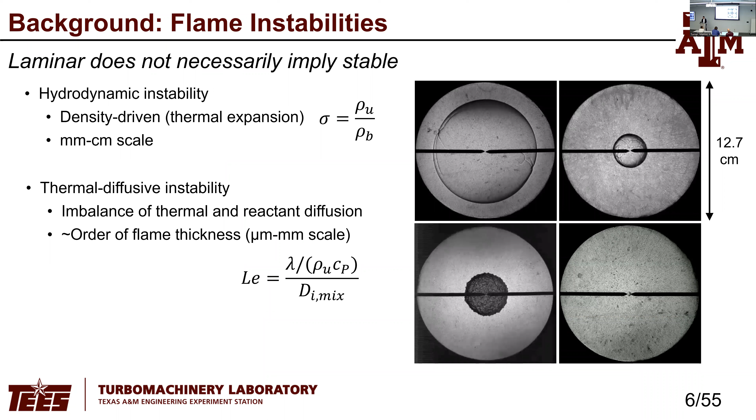Thank you. Yes, thank you. I've seen your test rig 2 or 3 times, but I still don't necessarily understand what I'm looking at here. So this is through the window of the bomb, right? Yeah, and we've got a sparker. Is that what that is? Yeah, it's basically like a spark plug. A long spark plug, yeah. Okay.